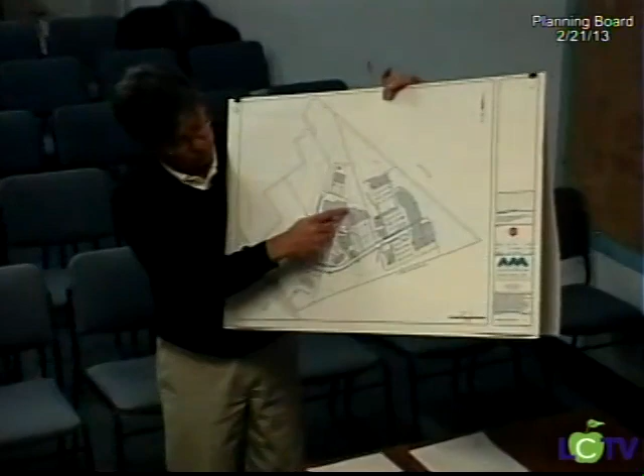Pretty much in keeping with the original plan, we have the roadway being built up to here—we call this P1, P2, P3. These are the buildings that will start now. It includes a building traditionally laid out for anywhere from 2 to 3 tenants, up to one 60,000 square foot tenant, nothing larger than that. Although there are a lot of anchors much larger than that who have recently expressed interest, we are happy to keep to the smaller size tenants, keeping with the zoning.

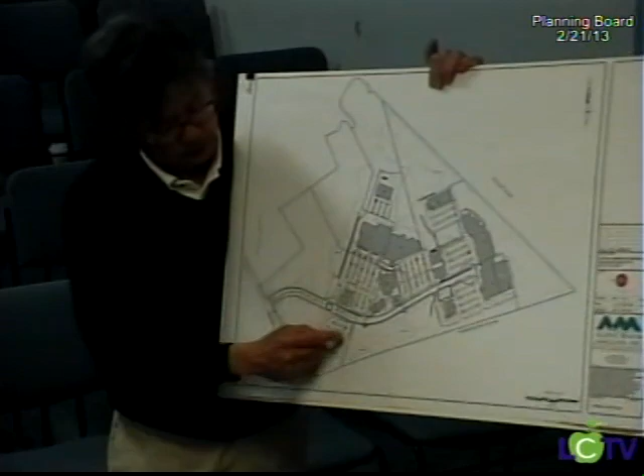There's a very neat little two-story portion here that bridges from the lower elevation to the upper elevation, and then we have the remaining stores here. This part is becoming our sexy entrance to the overall center—it transitions from this anchor pad up into an area that has pedestrian streetscape. We're envisioning inlaid chess tables in the plaza areas.

The pricing for the big screen movie theater that we were looking to do there may be prohibitive, but we're still evaluating some options for that.

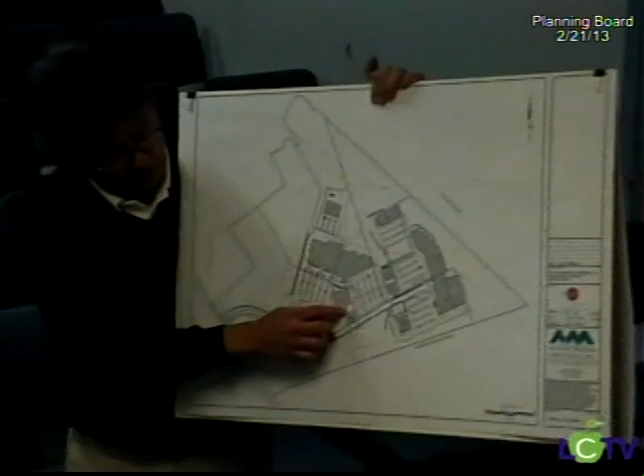We just met today with Indian Hill Music, which, by the way, is a great organization in Littleton. We're going to look to build stages and such, so that we can have some performances and also give them an opportunity to promote Indian Hill Music on site. One of their big challenges being inland in Littleton is they don't have exposure to destination shoppers. So our idea is we'll probably donate a kiosk or stage that allows them to brand that type of use, and then we'll use it for other things—summertime skits or plays, or kids doing performances. We're trying to activate the area.

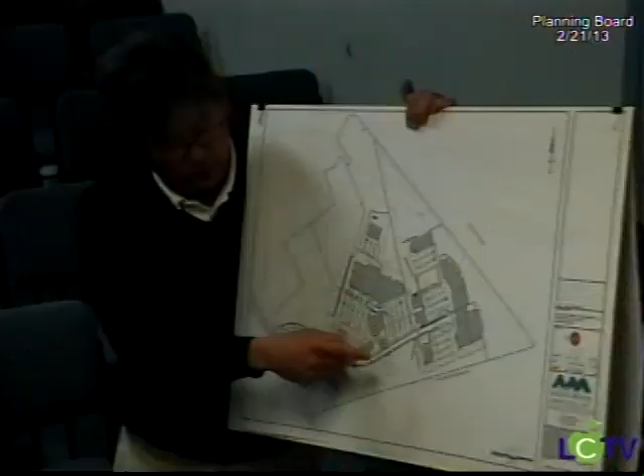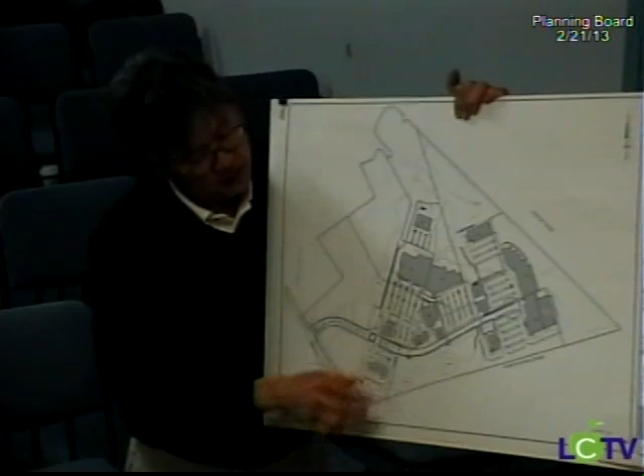We have 2 or 3 entertainment, recreational spaces. It's this area here, which you can show. We have an area up here that was intentionally carved out earlier from the wetlands—so it's not in the wetlands, but we've preserved that. We're actually contemplating splitting this building, originally one long building, into two buildings to create the same kind of walkway effect through it. And then we have this part here, which would include, in all likelihood, a cinema and some additional retail.

We also have, on a separate track with this, knowing this is perhaps 12 more months out than the rest of this part of the center, we are fully evaluating office headquarters options as well, with cinema and office. So those are both still sort of live in the making.

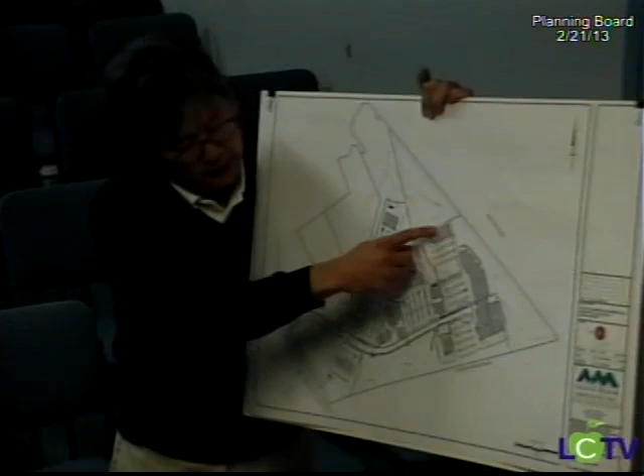And we are contemplating the hotel now. We have actually gotten interest from 2 or 3, both the Marriott and Hilton chains have approached us. Economics are a little bit tough. This is a pretty costly site to develop, so we're trying to wrestle through that right now. So that's pretty much the update. I will let Tim give a quick update on what the ANR is.

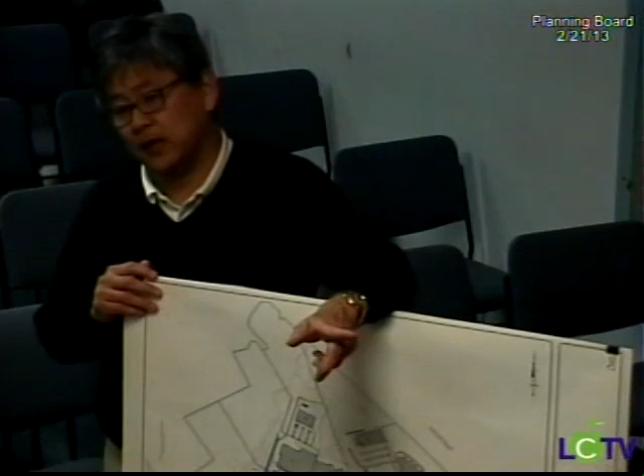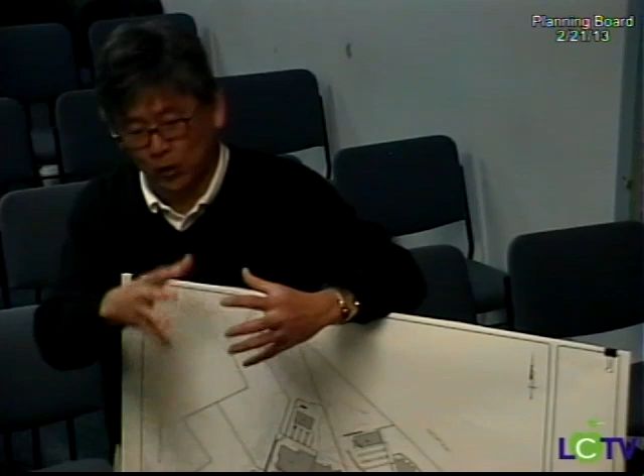In the capacity of the hotel? Yeah, right now we're looking, I think probably one brand is looking for around 96 rooms. The other brand is looking for about 120 rooms. So it's that sweet spot of 90 to 120. It will not be a 200-room hotel, nor will it be a smaller 60-room hotel. There's usually either the small hotels in the 60-room range, then you get to the 100-room range, and then you get to the 200-room range. So I think they're all looking at the 100-room range with some conference capability as well.

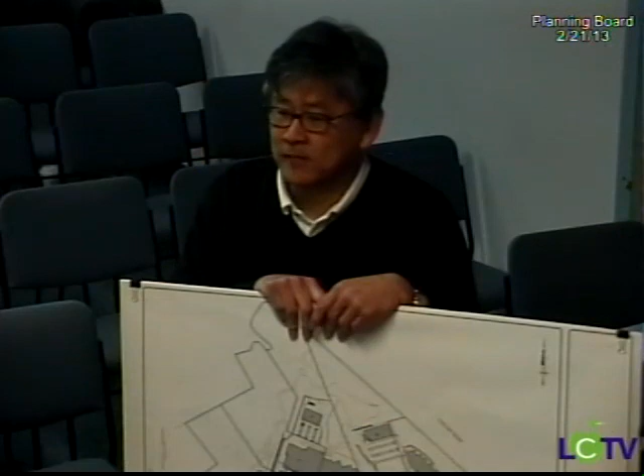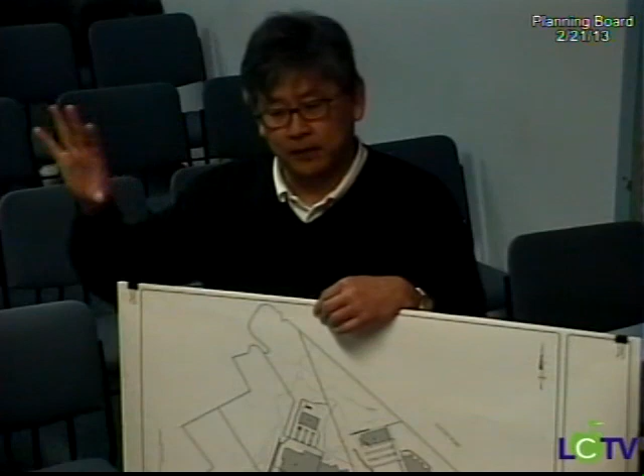And sort of the division of long-term or... Yeah, they're actually looking to do a business hotel. To an extended stay? Just extended stay completely, or a mix? No, it's actually not necessarily extended stay, although I think one of the brands, I forget which one, is more interested in doing extended stay. The ones that we're actually most likely to enter will be more of a business hotel, so a slightly smaller footprint than the extended stay hotel version. But it's interesting to see that IBM, we've been in touch with them, they have a lot of interest in making sure that the hotel succeeds.

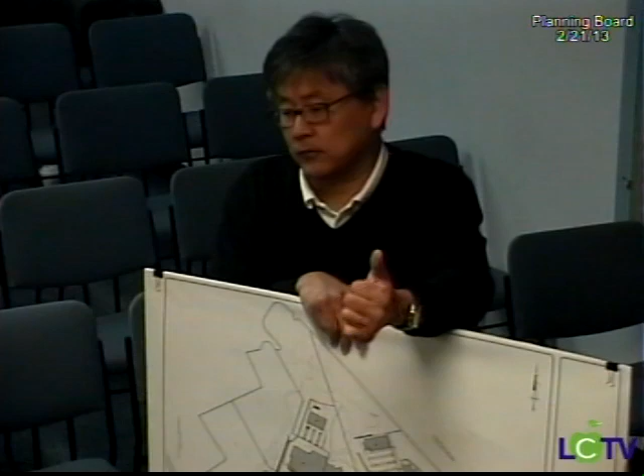Any idea what might be going down there? Well, we will know probably within the first wave of what I'll call initial tenants. We have been focused on the restaurants. We are wrestling with the anchors because they're proving to be a little bit more scarce just because no one knows which way the economy is going. But we will have probably 4 or 5 restaurants in phase 1. One of them may get pushed off to phase 2 just because of location. They would include, in all likelihood, a higher-end sports bar type family restaurant. It would include an ethnic, possibly Japanese, Mexican, a seafood place, and possibly a high-end steakhouse. So those are the 4 or 5 restaurant concepts that we're looking at.

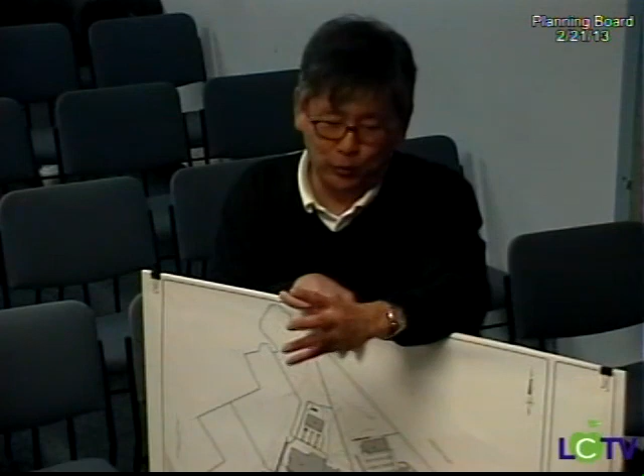In addition to that, there are a host of purveyors of yogurt and other quick casual type concepts that have interest in this area as a whole. I would think probably within the next 90 days I will be able to announce a few of them. But those are the types of tenants we're looking at.

I will tell you, our demographics imply this wants to be a slightly more family-friendly center, in that where some centers look to discourage kids and teenagers, we actually put together a group of 12 or 13 kids between the age of 15 and 18 and asked what they like about shopping centers, malls, and entertainment. We got a really interesting list, everything from a curling rink in the winter to a climbing wall to just places to hang out by fire pits and what have you. So we are gauging which ones are real and possible, which ones are insurable, and which ones won't scare our tenants away. No Chuck E. Cheese's. I think those probably, we'll leave that for others.

But I think the idea of having some family restaurants and the theater really is a big driver for this. There seems to be real interest from 2 theater companies. Assuming we can get over the hurdle of how much it costs to build one versus how much they can afford to pay, we'd hope we'd have that start earlier than later.

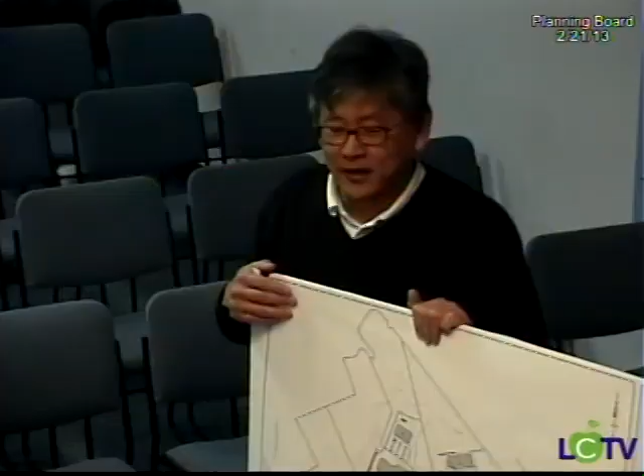We are looking at Bass Pro Shop. Unfortunately, that's 105,000 square feet, which makes it a little challenging. We do need to find basically 4 anchors to make the center actually kick off. We'll probably take the risk on this right away, and we're already speccing the shell on this part here.

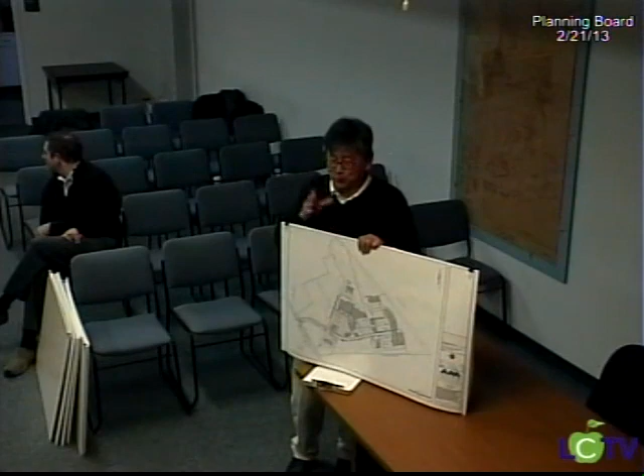I've tried to stay in touch with Jack Donlin, but there has been enormous grocery interest, which I find rather peculiar. I shared that with Jack. Actually, Jack was one of the big supporters of gaming because he knew that would solve that problem. It's interesting because there seems to be a lot of interest there, but we haven't gone down that road quite yet. I know Jack's a local, and I stay in touch with him to let him know where things are going. But that's pretty much it.

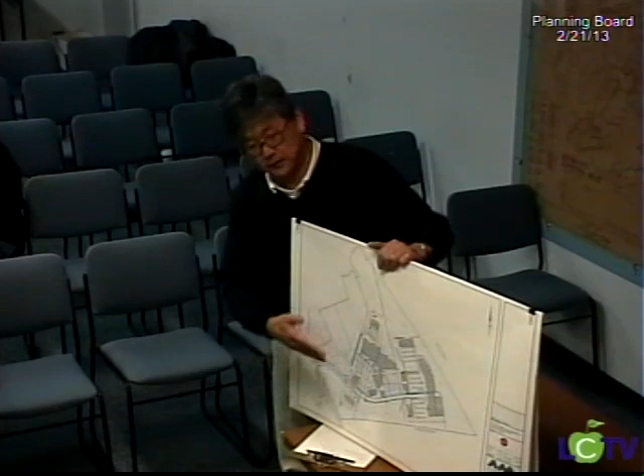Hopefully, as you can see, we'll start the vertical foundations for this whole complex as early as next week or 2 weeks, as soon as the snow stops. I think this weekend's snow forecast has postponed us another week, but we've started the foundation and ordering the steel.

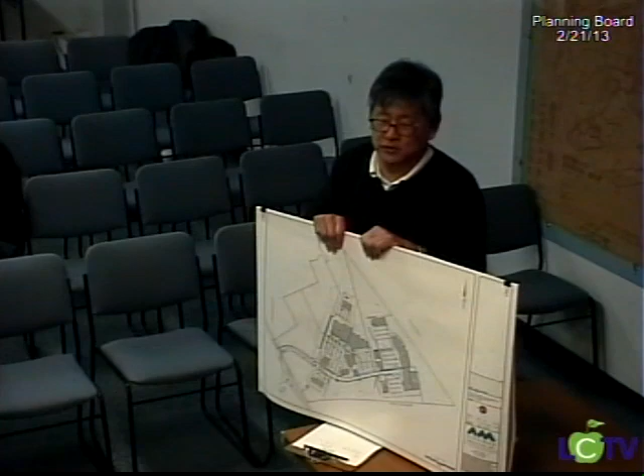Just one last update before I give you a quick update on the ANR plan, and then I'll end with where we are on the roadway, which I think is important. Just for the record, Tim Power is now with Land Strategies.

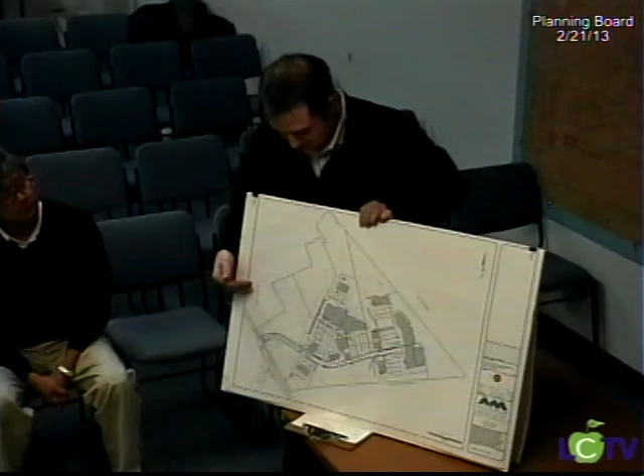There's not much to the ANR. As it implies, it's approval not required. It's just shifting some of the lot lines around. I don't have an overlay with the old lot lines because it was actually just too confusing. The only thing that's changed, and the reason for the property line change, is as we design these buildings, you push a little bit here, pull a little bit there, and these lot lines that are right on the building need to just adjust for that.

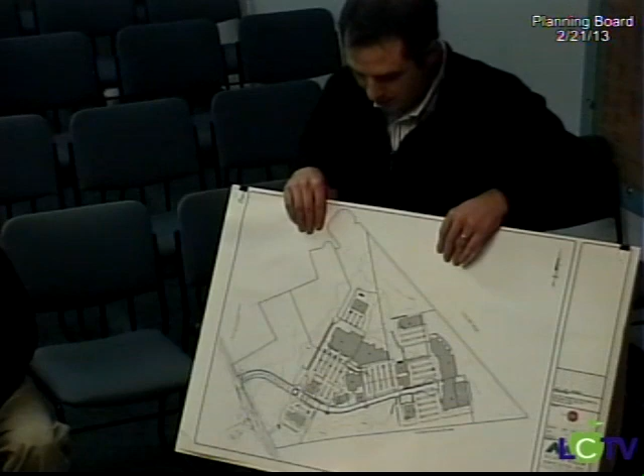We checked again to make sure that the way our leasing is coming together, we comply with the zoning of no more than 60,000 square feet of retail on any one lot. This lot line may have looked a little different previously, but it was just to make sure these buildings were separate from this building and we comply with that zoning. Same number of lots, still just 7 lots. We were able to move things around, but essentially the same theme, with the surveyor who did all the work and calculations, checking all the zoning requirements for lot shape and whatnot.

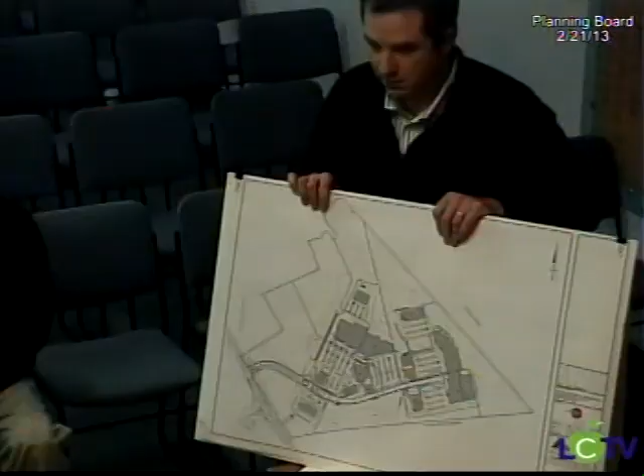You said 60,000 per lot, and that one there looks like the line goes right through the building. If you have 60,000 on the left and 60,000 on the right and the lot line goes through it, you still met your requirement, but you could have a 120,000 square foot one-shot building, correct? Actually, it's a little difficult because of the fire and code requirements to separate the buildings. There's actually 2 separate foundations for each building, as well as a 2-hour firewall.

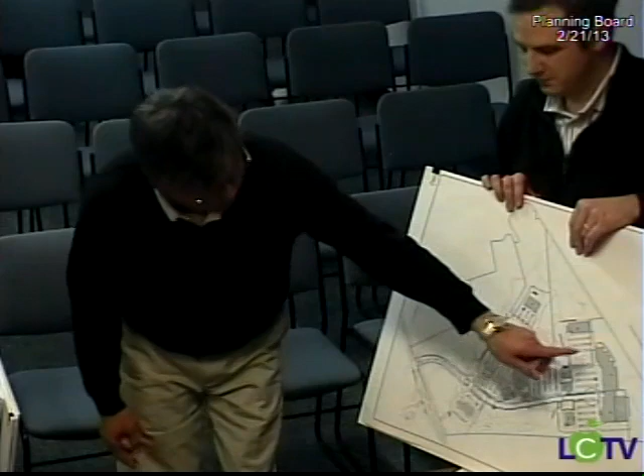This one is for the 0 lot line coverage. I'm not saying there's a problem with it. I'm saying we could get a Target or somebody, but the problem with that is we really are looking for this diverse tenant mix. So this building here is really separated primarily because of the uses. The cinema, which is not considered retail but assembly use under the code, is sort of separated because of the fire ratings and whatnot for the lot as well.

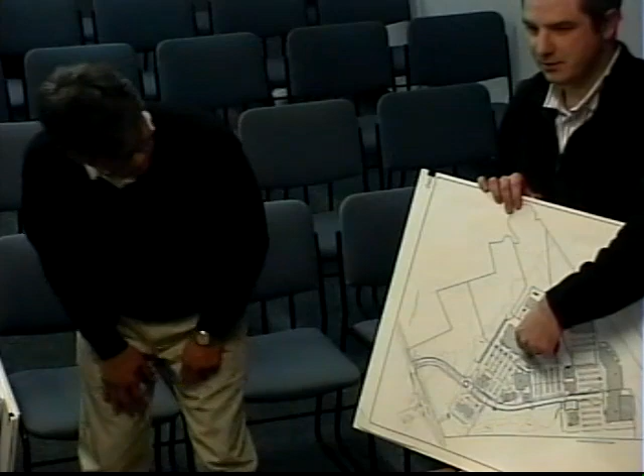So this is likely to be retail. This is either going to be office or cinema if we switch them. But yes, that's a good point. This wall will never be open. To open up the wall and then fireproof everything and keep the property line there, it would be easier to go and amend the zoning and do all that beforehand.

We did do this for separate stores. We did the 0 side setback requirements for this. That was part of the new overlay.

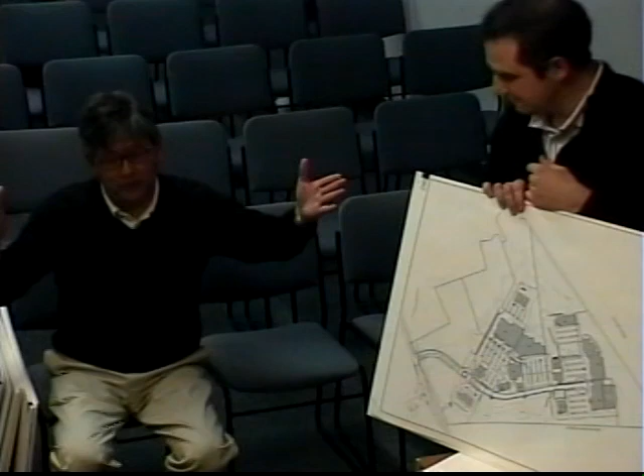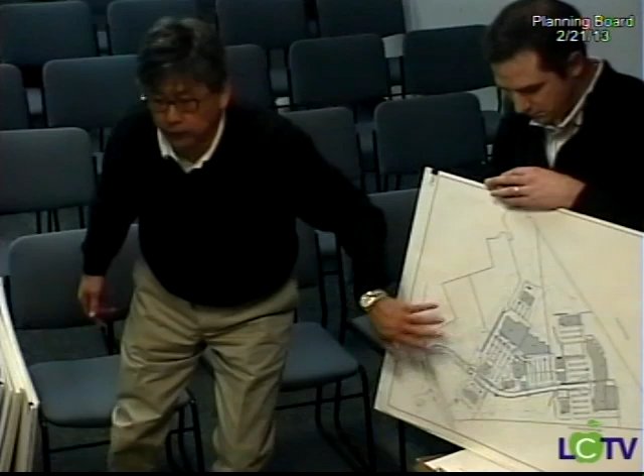You know what's nice, as we've gone through this, it really became apparent as our architects were designing it - if you look at things that don't have 0 setback, you end up with gaping holes of 50 feet between the frontage, and all it becomes is dumpster locations or cheap sidewall with no windows, because walls that separate sidewalls never have windows. In this case we've windowed this side because it's important to have the front door window. But in the renderings, all our dumpster locations are backside - it's a hidden benefit of the 0 setback.

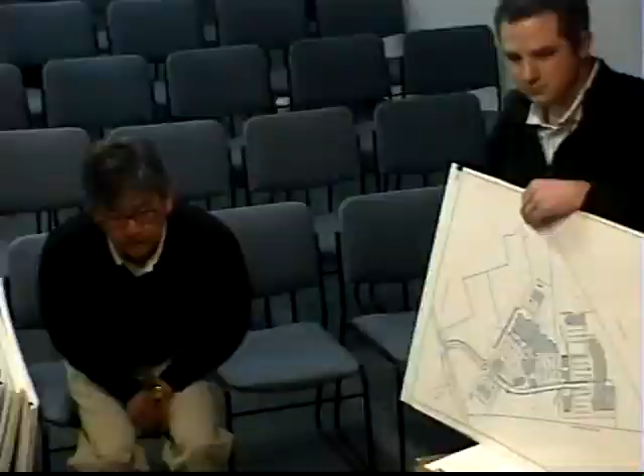I'd encourage you to pass that as a general zoning thing for mixed-use developments, because it really opens up the ability to make the pedestrian walkway completely continuous. The only places we've opened it up is where we're having pedestrian pathways intentionally with fire pits and such - it's like a cityscape, if you look at the pictures. With the 8 feet together, it makes a nice community.

The walkway - people have done interesting things in different places. I think of Salt Lake City and the Creek Way. So people will be able to navigate through and go back. There will be a pedestrian way both in front and going back toward Phase 3. The entire design has been very focused on how we connect anyone who parks here through the center.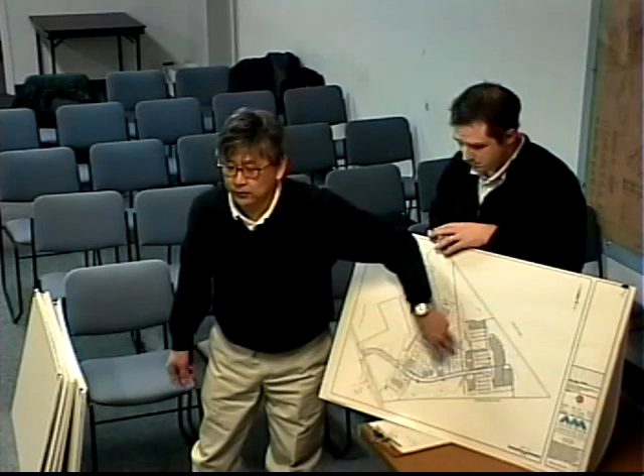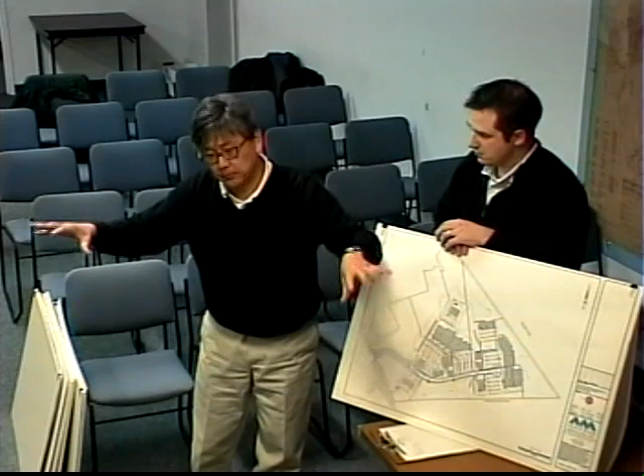In terms of stairwells, creative little plaza areas invite you through. Some things we're looking at now, not finalized, but hoping they can be done on an affordable budget - in some areas we're looking to do firefly lighting, lighting up the natural environment. There are new LED lights that almost look like Christmas lights but create this firefly look with a nice little glow. We're looking to light up some areas with these special fixtures to draw the customer's attention and lead you through the center.

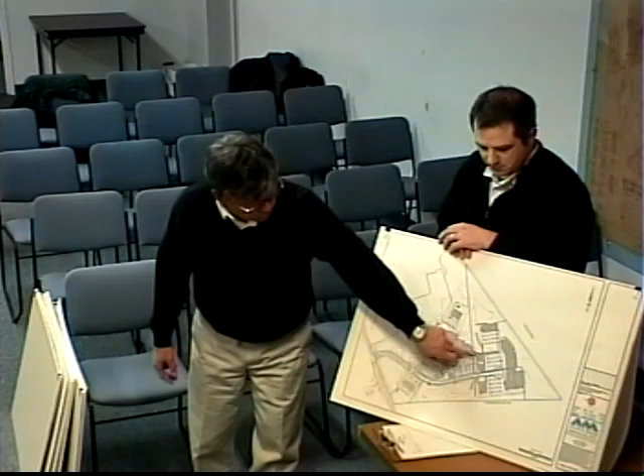So we're envisioning maybe a little performing hut here, some passive areas for sitting, maybe a fire pit down in this location. We imagine spill-out from any restaurants onto these plaza areas - I think that will activate the whole center. We're changing 40 feet from here to here, so you have to fool them into making that walk up the hill.

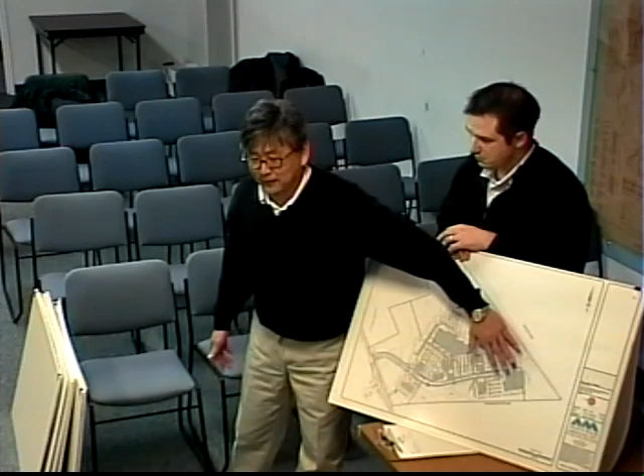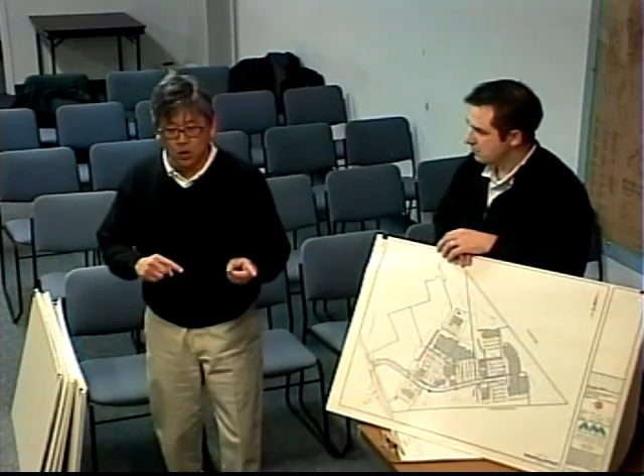For the entertainment area, at least in the Board of Selectmen presentation, it was mentioned as a mid-level entertainment theater - not high-end, not low-end. We're not doing high-end or low-end, they're all high-end these days, but not massive - not a 16-screen, 3,000-seat cinema. We're trying to work it down. Cinemas today range from 30,000-35,000 square feet up to about 80,000 square feet. We're targeting 35,000 to 40,000 square feet, maybe 45,000, depending on concession space or party room space needed.

Great, thank you, sounds good. And last thing on the road, if you care to know, we've slowed down - you guys probably owe Jim a raise for all the work he did the past 6 to 9 months. We're pretty much on schedule, I think on budget. We have a few change orders being negotiated with the contractor, but for winter shutdown this was all planned and customary practice. I think they've made good progress - they got the initial paving down. No problems with anything they've done. The state's happy, and we should be reactivating them by end of March, sometime in that time frame.

It'll be exciting to see buildings starting to go up. We pulled the foundation permit a couple days ago - no, the permit was pulled a month ago. I think you should see foundations and then steel going up at the latest by May.

Thank you, anyone else? Any questions? Oh, sounds good. Looks very good, very nice.

About to close the meeting? I move we close the meeting. Second. All in favor? Aye. Great. That's an early meeting. Early. Good, Chair.